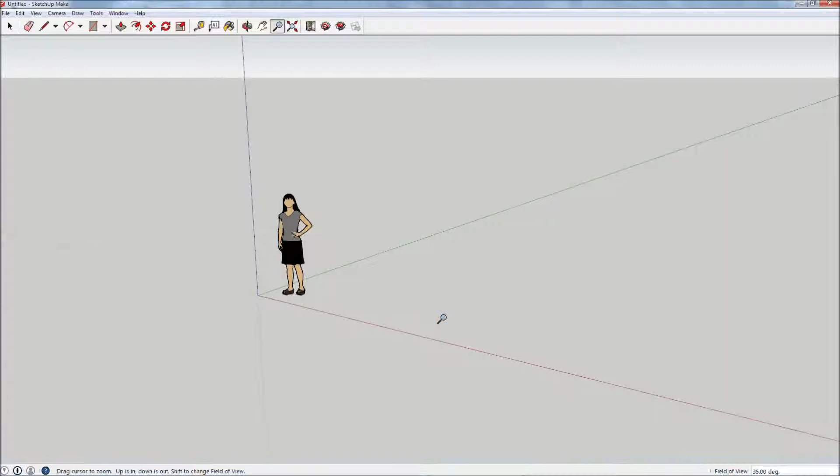Hopefully you've got a basic understanding of the basic tools. We'll start with the most useful initial tools, the orbit tool. You can press O as a shortcut, or it's up on the bar there. Once selected, if you press Shift, you can pan. Mouse wheel to zoom in and out.

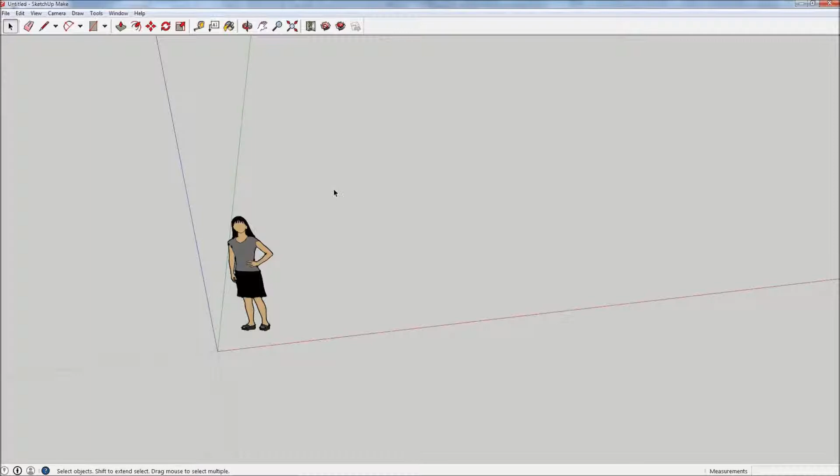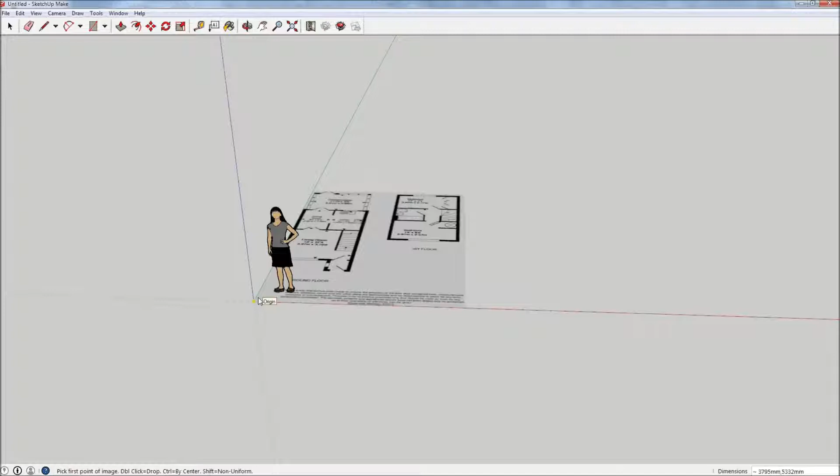Okay, so the first thing we want to do is import the level map. To do that, go to File, Import, navigate to where the level map is on your system, and that should bring it straight in. Then just drag it to the origin until you see the origin pop up, and then click to deselect.

Okay, when you open up the new file, incidentally, just make sure you select millimeters, so architectural, and then millimeters for the units we're going to use.

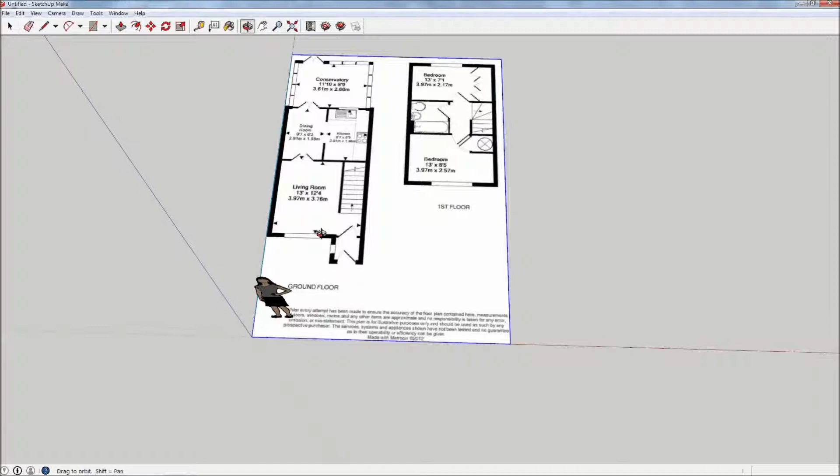Okay, the next thing is to just look at scale. So if we just zoom in on a doorway, that's usually a good area to work out the scale of the rest of it. If you select the tape measure, click and drag across the doorway, you will see in the bottom right hand corner the dimensions. Now mine are 308 millimeters at the moment.

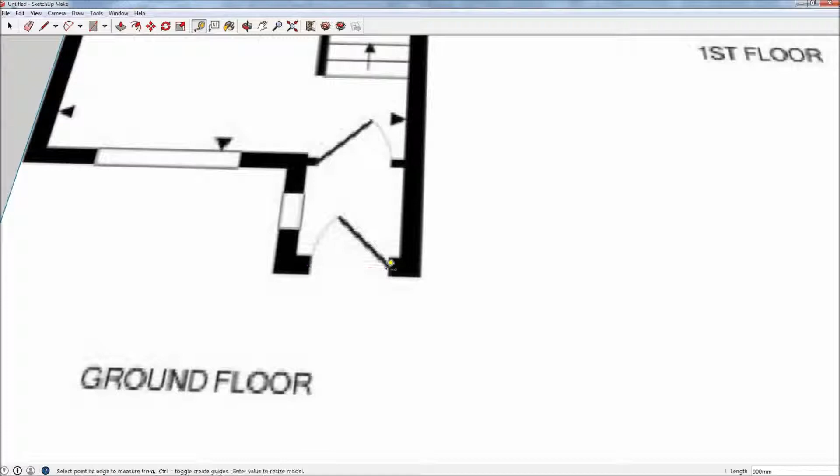I'm going to increase that to 900 millimeters, which is 3 feet. So drag that across, type in the new value with the mouse button still down, release the mouse button, press enter. That will ask if I want to resize the model, so I'll say yes to that, and that resizes the entire model to that scale. So again, a good way of just initially setting up the scale.

Okay, what we're going to do now is separate out the ground floor and the first floor. To do that, we right click on the image. Let me just deselect the orbit tool. So with the selection tool selected, you can press spacebar to switch to that.

Right click on the image and select explode. That basically turns the image into a texture, you see it pixelated. I want to click on it now, so I want to separate out the two floors. Just zoom out a bit. Select the rectangle tool, drag a rectangle over one of the floors, and then group that - edit and make group.

Spacebar back to the selection tool. Actually, if we just move that new selection away, I'm going to click on one of them and separate them out with the move tool. So I've grouped the one on the left, I've grouped the one on the right now. So edit, make group, move tool, move them around freely, separately now.

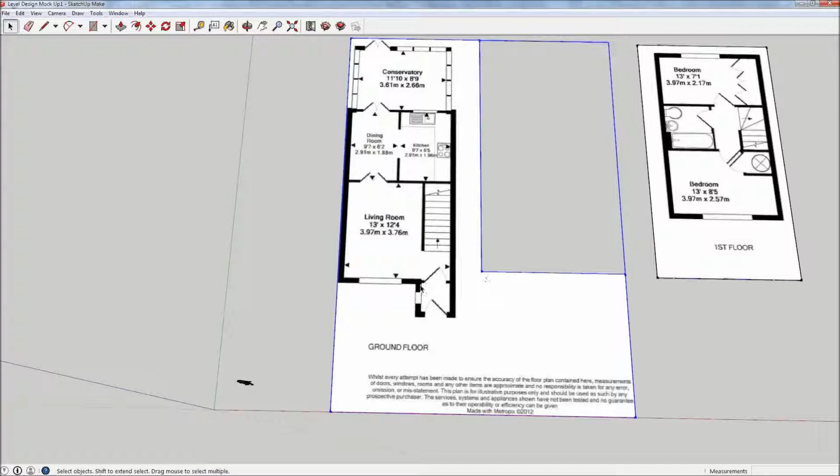Okay, so the next stage is we're going to start to project the walls up from the plan view. To do that, we want to actually go inside the picture file. So with the selection tool, space bar to selection tool, we right click on the image, select edit group, and we can go inside that group we made. If there are any untidy edges like I've got here, you can just tidy those up by selecting the edges and then with the move tool, just trimming them in a bit.

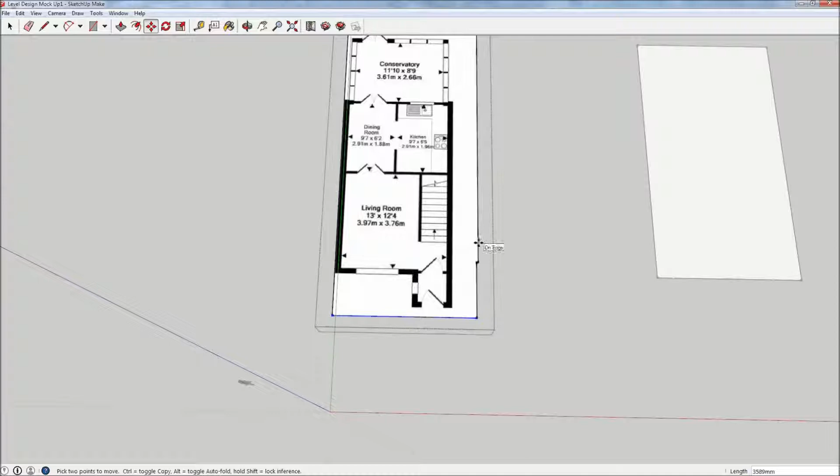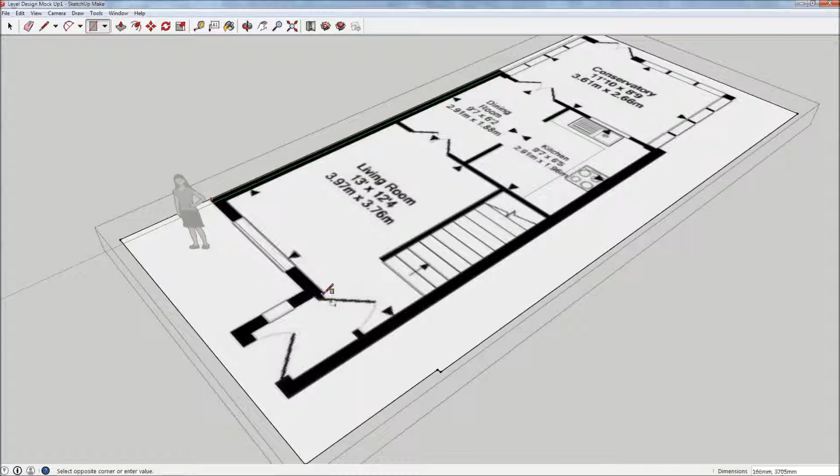Okay, so the next stage, if we're now just using the view tools, get to a suitable viewpoint. Now with the selection tool, if we double click to go inside that group again, then if we use the rectangle tool - and again don't worry about this being absolutely exact at the moment - we'll draw out with the rectangle tool, draw over a section of the wall.

Then with the push pull tool, we drag up, project up a section of the wall. We want this to be 3 meters high, which is 3000 millimeters. I'll type that value in. Sorry, let me do that again.

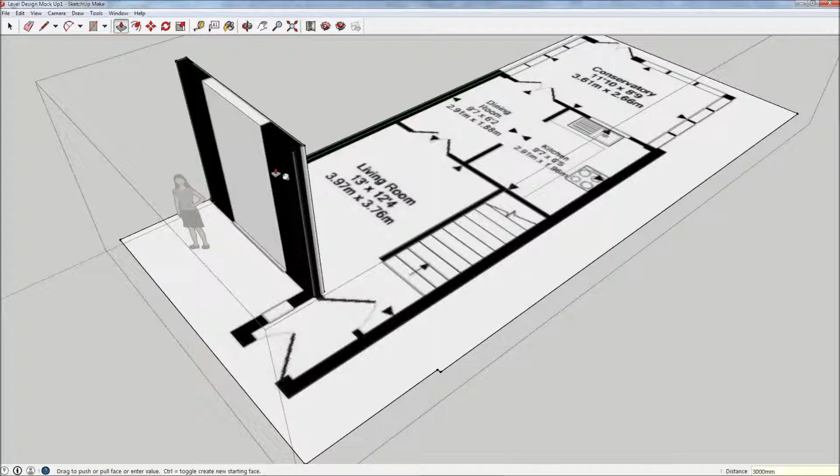Type the value in, press enter, that will size it to 3000 millimeters, then release the mouse. Okay, that's our first wall. What you'll notice is useful about this is it actually projects the plan view up as a texture onto the wall, so we can still see where the window is, which is extremely useful.

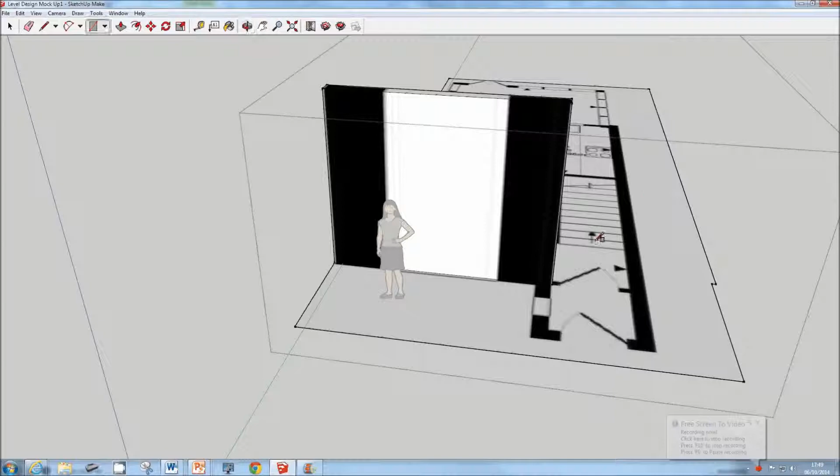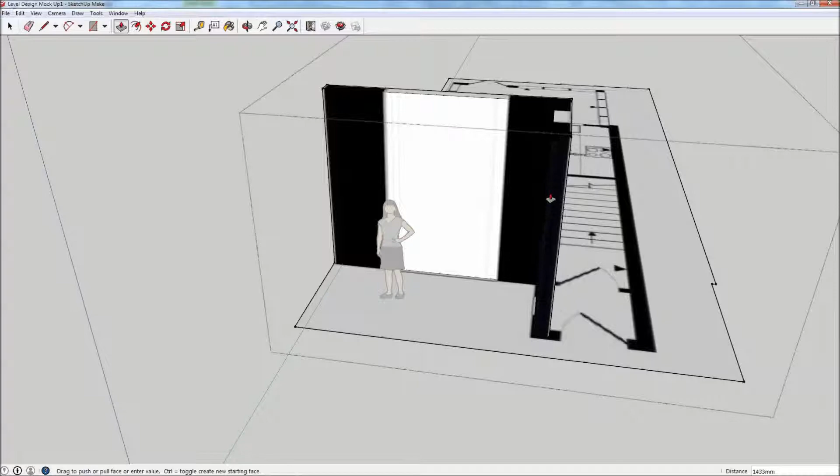So the next stage is to project a wall from this first initial wall. We'll project this wall off around the main doorway here. Basically, just referring to the plan, we draw off another rectangle that takes the plan as its reference point. So we draw the rectangle on the face of the existing wall, then back to push-pull, and drag that wall out so it projects out from that initial wall.

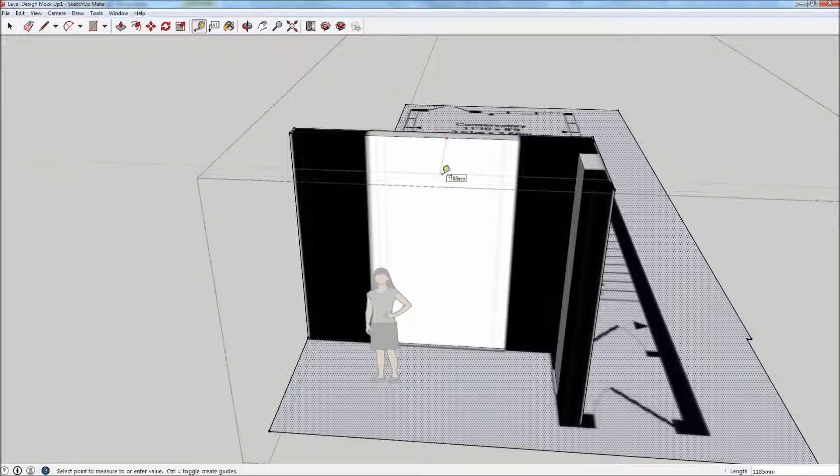Okay, so the next stage is we're going to look at creating a window. If we've got our measurements on our plan and we want to measure out the size of the window, we can use the tape measure again, and we can drag off measurements from edges. Now, the thing to remember here is, if you look at the X, Y, Z axes, the vertical axis is blue.

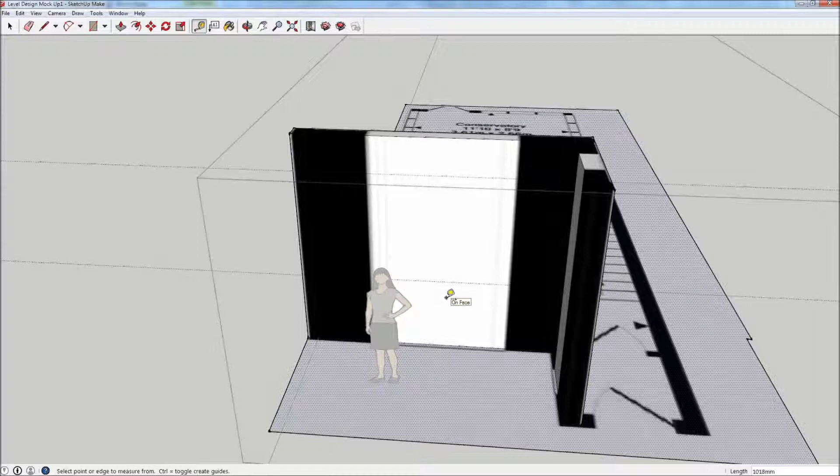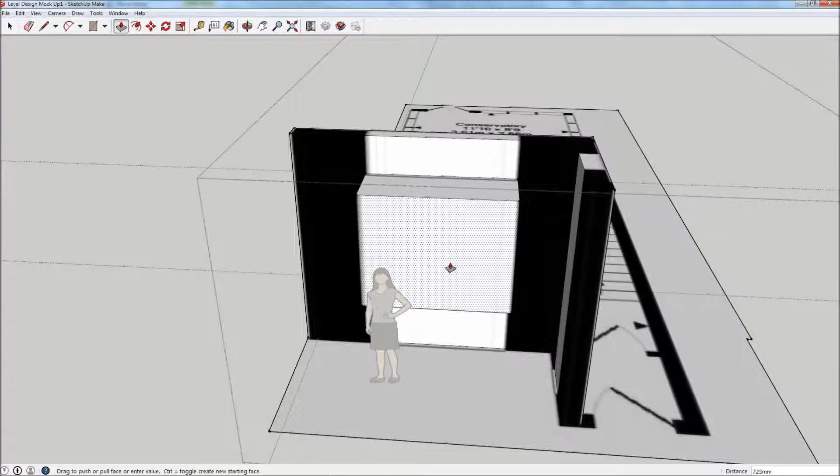So if you're dragging and the arrow isn't blue, be careful because it won't be flush with the face. I'll drag that down for the top of the window. I'm not sticking to any measurements here, and that up to the bottom of the window. Then with the rectangle tool, we can draw out the window. Make sure the window is selected. When you drag this through, drag it until you see this little dotted arrow coming off the push-pull tool, which indicates you've dragged it all the way through to the other side. Release, and that'll have punched a hole in the wall.

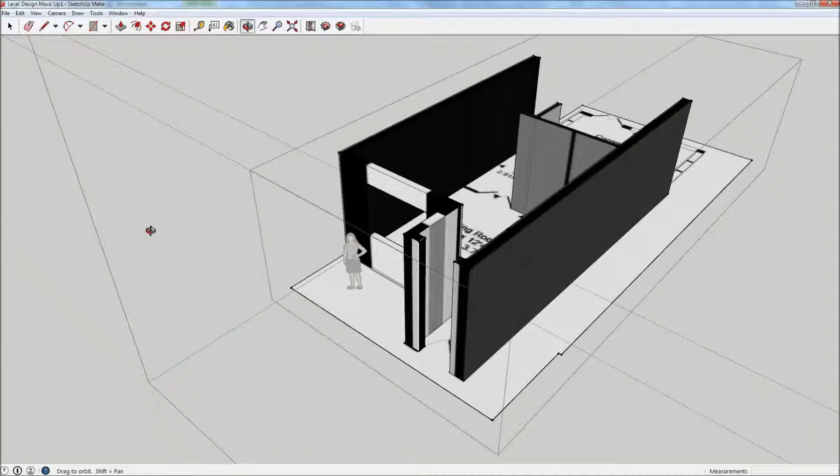Okay, so just added a few more walls here. What you can do to really neaten up the appearance of the model now is start to think about adding textures or colours to the walls. Very simply, there's a paint bucket tool here at the top. You can press B to open that up. And there are a series of pre-made textures in here you can choose from, or there's a colour swatch.

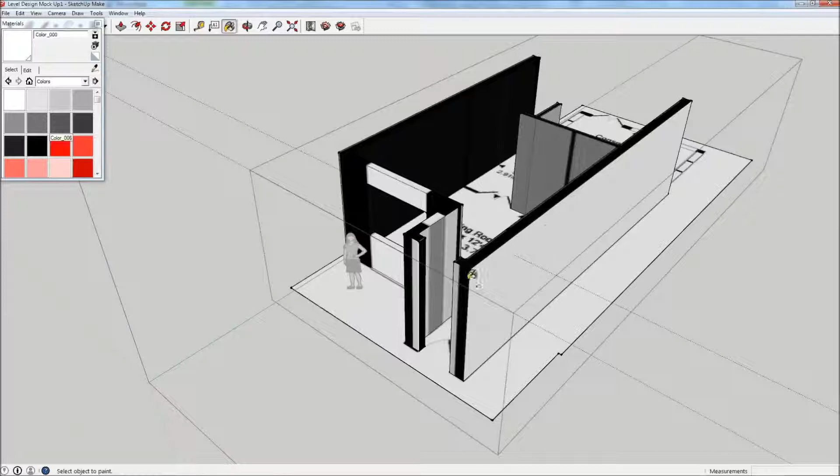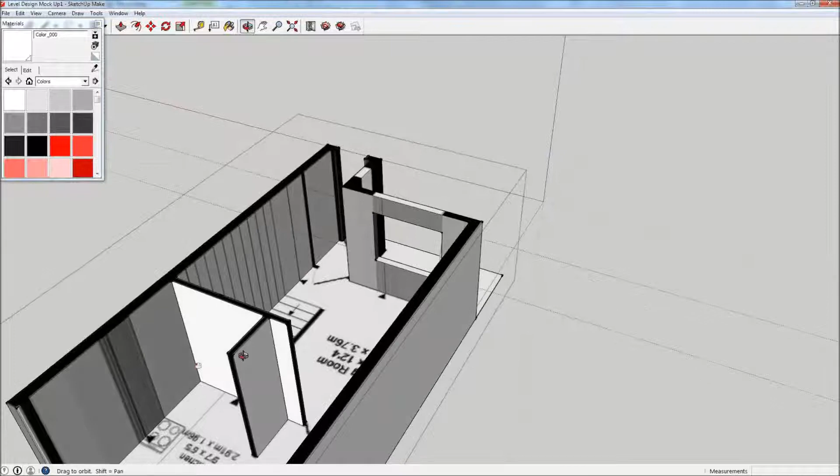So I'm just going to go for white, just a simple white. You can select the colours from the drop-down menu here, select white, and then simply click on the faces of the walls. Obviously keeping the top face, because we want to reference that to show us where doors and walls should be. Click on, use that on interior walls. Okay, so just a way of neatening up the model.

Okay, so now we're going to look at placing one floor above another. Obviously we've modelled the two floors separately. What we want to do now is place this first floor on top of this ground floor. So I've just done a simple 4 walls here. And remember, these are separate groups, which makes it easier to move them around. What we want to do is place this exactly on top of here.

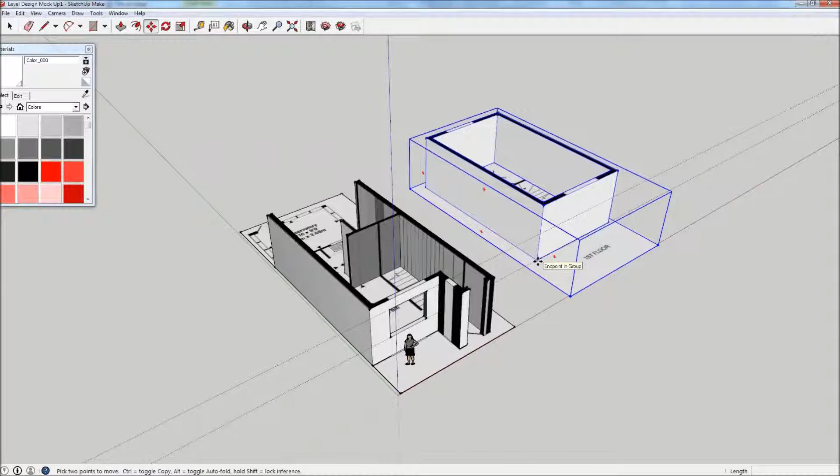A very simple way of doing that is using something called inference locking. So if I click on this corner point here with the move tool, then drag over to this corner point here, click again, that will be locked exactly one floor above the other.